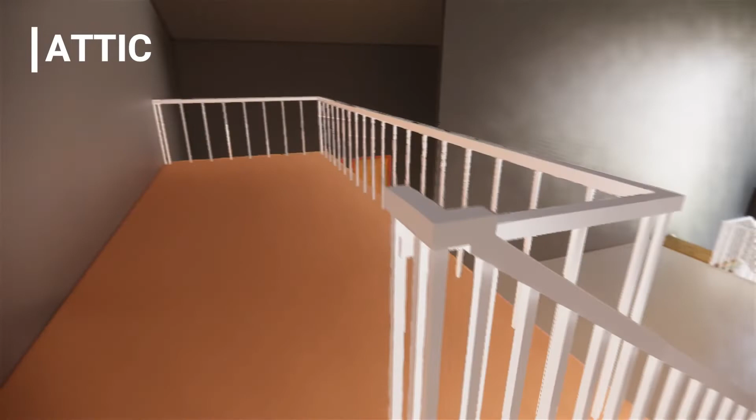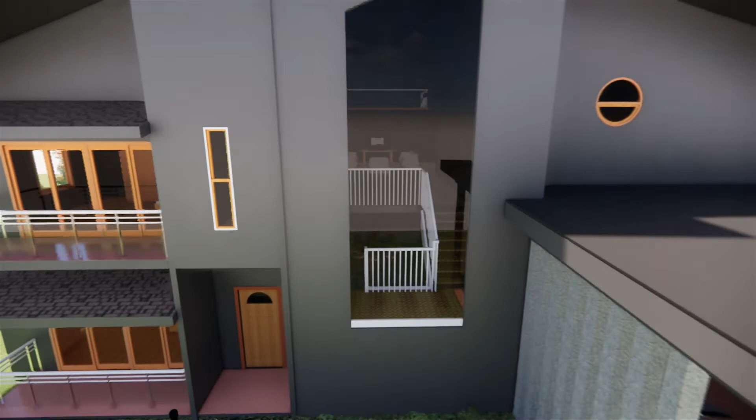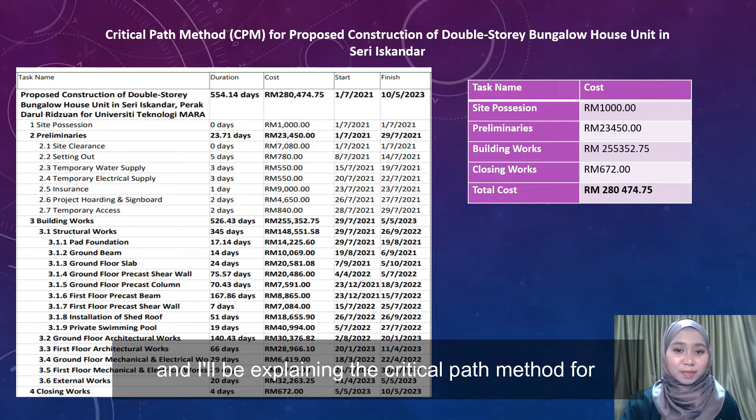Hi, my name is Nurul and I'll be explaining the critical path method for the proposed construction of a double-story bungalow house unit in Seri Iskandar, Perak.

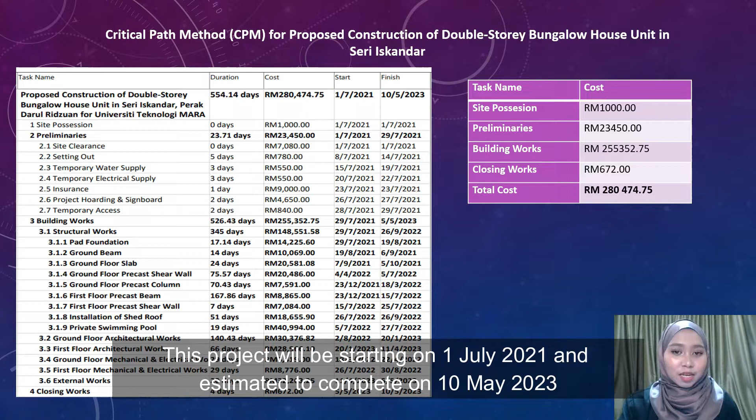Based on our estimation, the duration of this project is 554 days, around 22 months of completion. The cost of this project is RM280,474.75.

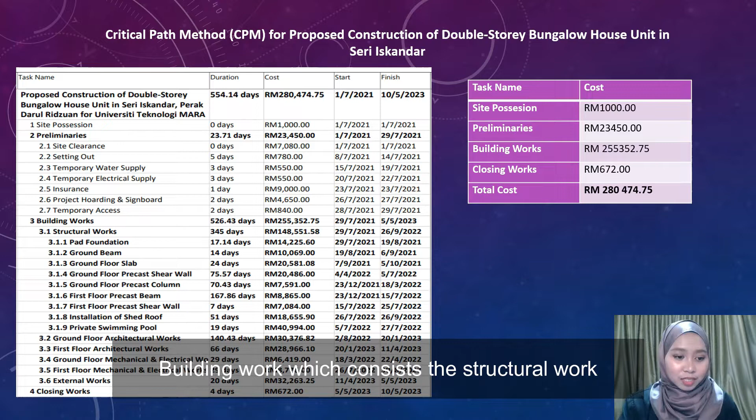This project will start on 1st July 2021 and is estimated to complete on 10 May 2023, starting with site possession on 1st July and continuing with the preliminaries work, building work which consists of structural works, ground floor and first floor architectural work, ground floor and first floor mechanical, electrical and plumbing work. The 3.6 is the external works, followed by the closing works.

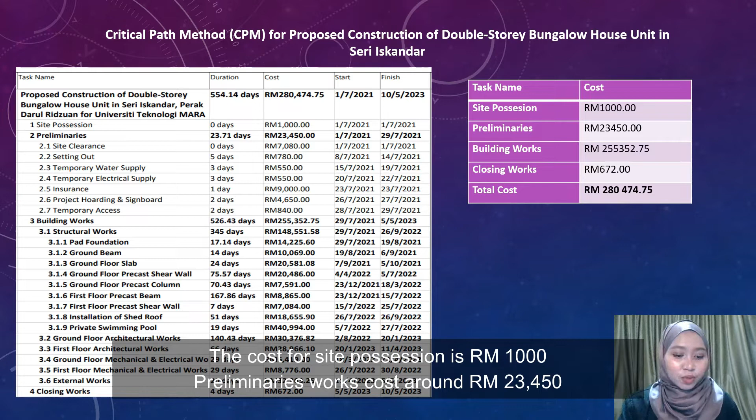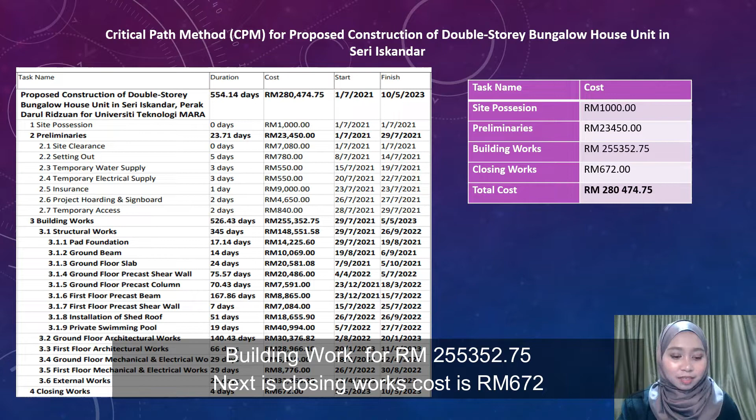The cost for site possession is RM1,000. The preliminaries work costs around RM23,450. Building work costs RM255,352.75. Next is closing works, costing RM672.

As you can see in the preliminaries work, there are site clearance, setting out, temporary water supply, temporary electrical supply, insurance, project hoarding and signboard, and temporary access.

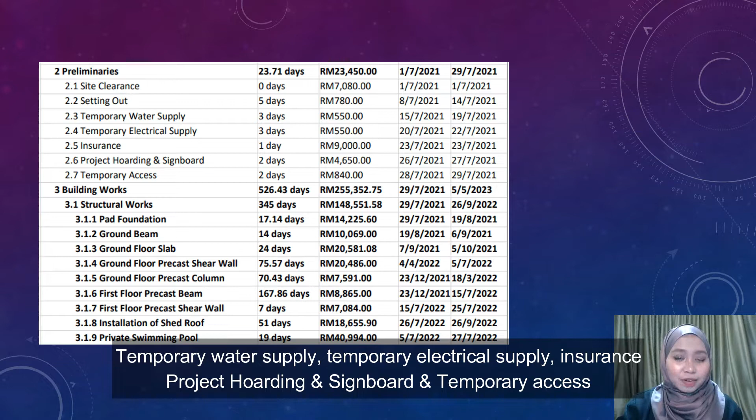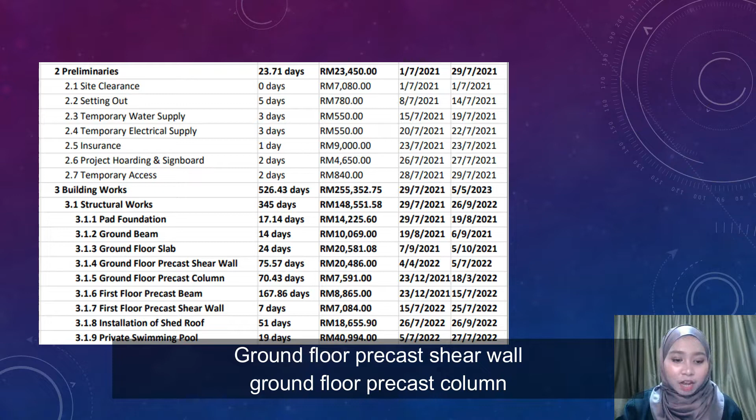Under building works, structural works, there are pad foundation, ground beam, ground floor slab, ground floor precast shear wall, ground floor precast column, first floor precast beam, first floor precast shear wall, installation of shed roof, and private swimming pool.

This is the financial and physical S-curve generated from Microsoft Excel. This graph includes cumulative cost and cumulative percent complete from the critical path method.

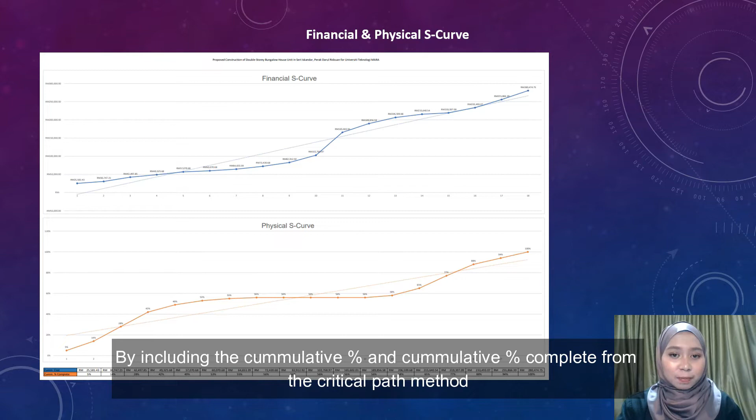Bismillahirrahmanirrahim. My name is Asyraf and I present to you the mechanical, electrical and plumbing of our proposed construction of a double-story bungalow house unit. For the electrical section, it can be divided into two, which are the power and lighting.

Firstly, let us look at the ground floor plan for the power. In this house unit, we are using duplex receptacle ground fault circuit interrupter, GFCI. The connection type is breaker and all of the sockets are paneled to a 600 amp 3-phase 208 volts. As you can view on the whole ground floor, we are applying chamfered wire as the type of wire arrangement, and the total sockets in the ground floor are 22 sockets.

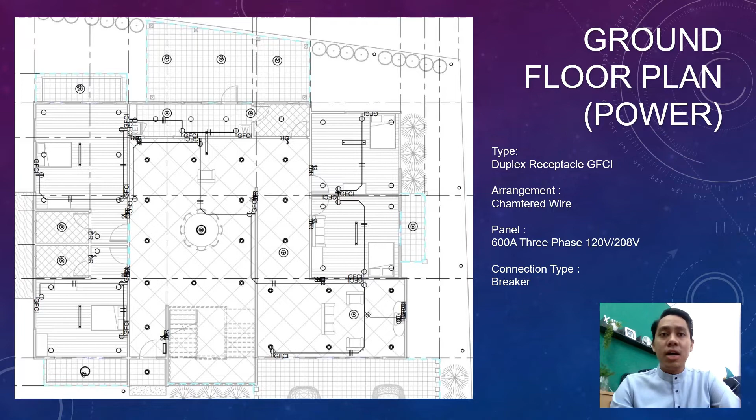Similar to the ground floor, duplex receptacle GFCI is used for the sockets, with a total of 18 sockets in the first floor. All of them are in chamfered wire arrangement, and every single space has a minimum of 2 sockets. Alright, moving on to the lighting floor plan.

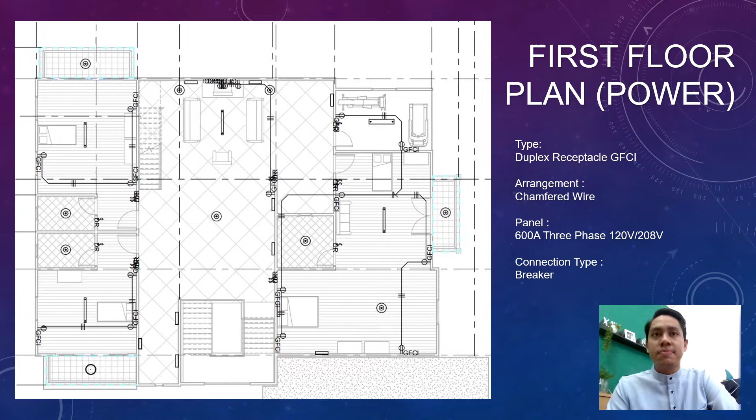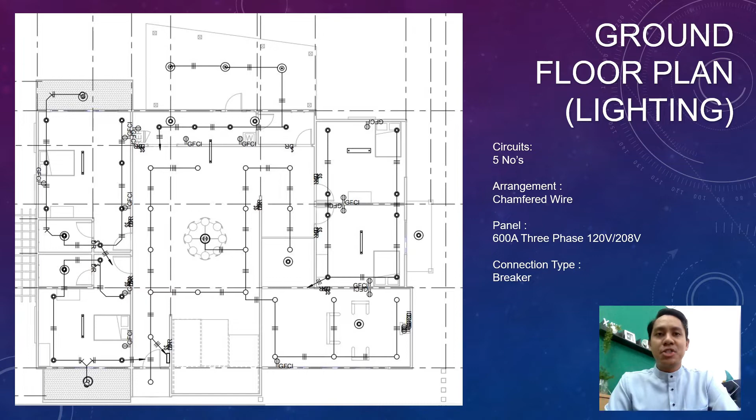As you can see, the wiring arrangement is also using chamfered type in the ground floor. A total of 5 circuits are connected as breaker to a 600 amp 3-phase panel board.

In contrast, a combination of arc wire arrangement and chamfered wire arrangement is implemented in bedroom 4 and 5 in the first floor. There are 5 circuits in this floor connected to different spaces.

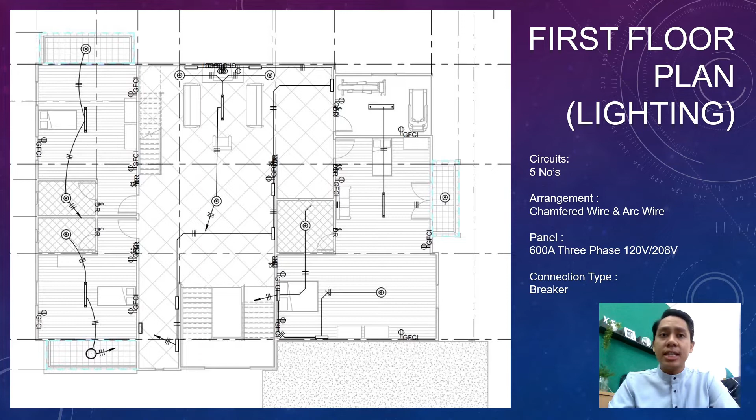In this building, different types of lighting features are used according to the spaces. There are 58 units of round ceiling lights in the bedroom, bathroom, kitchen and living hall. 2 units of pendant lights are used in the living hall and balcony.

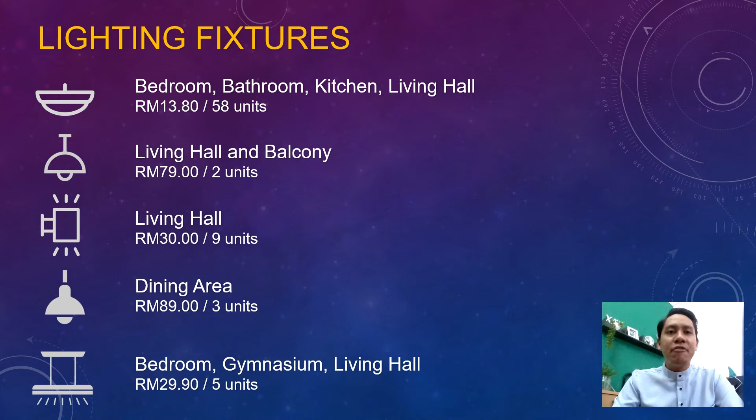Meanwhile, a total of 9 units of side-mounted recessed lights are in the first floor living hall. A hemisphere pendant light is used in the dining area, and 5 units of linear pendant light in the bedroom, gymnasium and living hall.

Furthermore, there are 2 types of piping system, which are sanitary and domestic cold water supply. As referred to in the drawings, the cold water is in blue color while the sanitary piping is in green color.

In all buildings, the cold water is supplied directly from the Lembaga Air Perak, and some of the features available in our buildings are bathtub, water closets, floor drain, kitchen unit, mop and work sink, and shower stall.

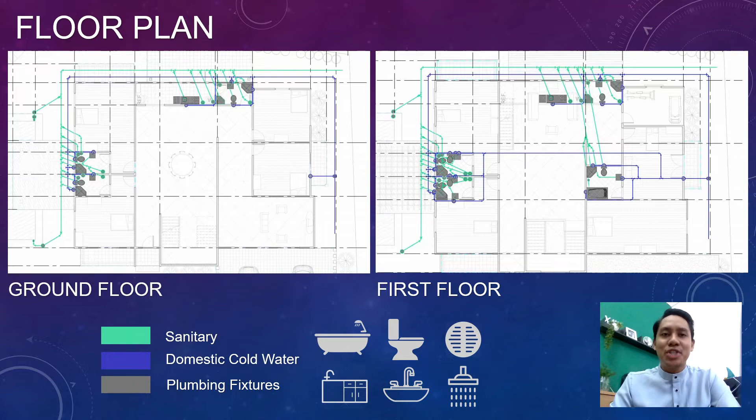Alright, to get a clearer view, here is the elevation of the piping system. The cold water supply is embedded 1 foot while the sanitary is 2 feet below the ground.

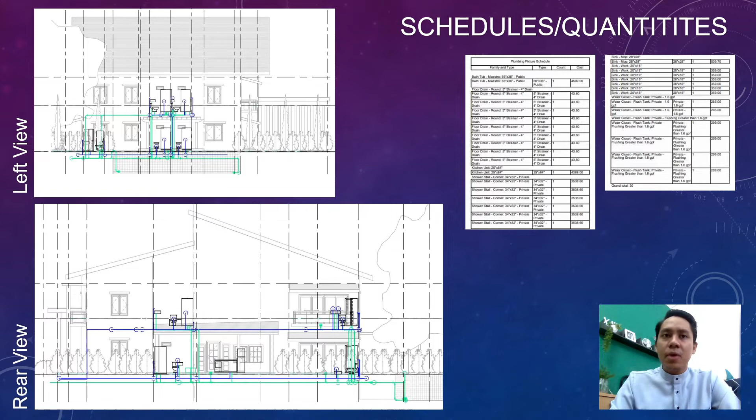The quantity and price of the plumbing system is tabulated in the drawings. And lastly, these are some examples of our plumbing perspective view in our buildings.

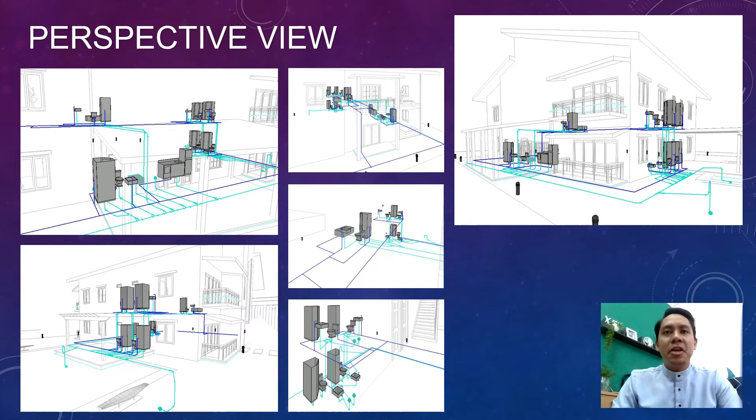This is our precast analytic structure. The precast elements are beam, column and shear wall. The structure is designed and constructed to withstand external loads without moving.

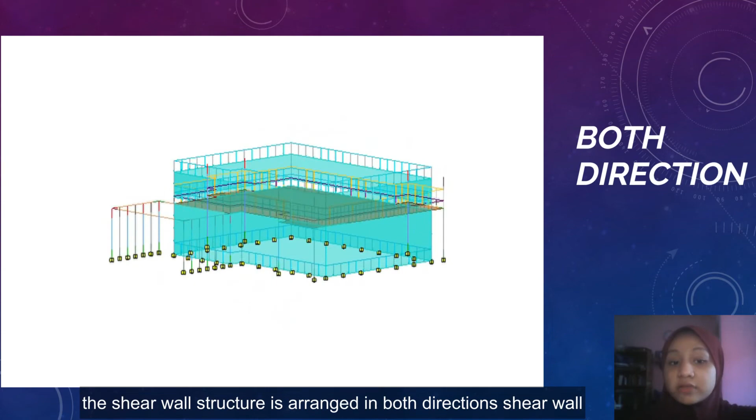Based on the concept of shear wall in the bungalow structure, the shear wall structure is arranged in both directions of the shear wall, which is the direction of two main axes of lateral stiffness. The bungalow is designed with shear walls to provide resistance to shear forces.

Next is the bending moments. The bending moment occurs when the structure is bent by a load at any point along its length. To calculate the bending moment for the bungalow, the magnitude of the loading is multiplied by the distance of the loading from the point of support.

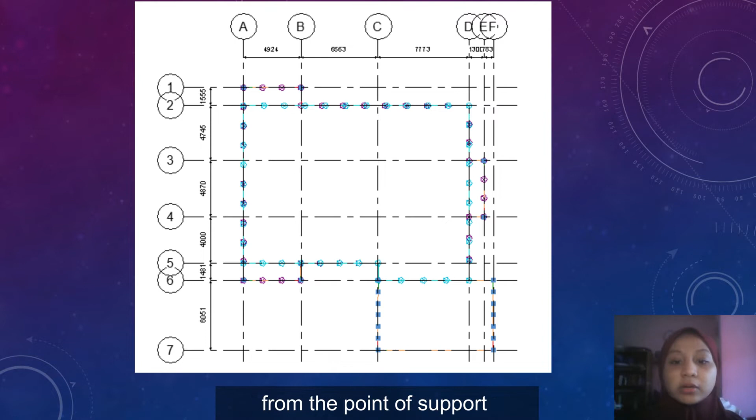The loading conditions for the bungalow are dead load, live load and wind load. This is the loading condition adopted for the analysis.

Firstly, the dead loads. The dead load is the self weight of the floor slab, considering 150 mm thickness: 0.15 times 24, where 24 is the unit weight of precast reinforced concrete, equal to 3.75 plus 1. So the dead load for the self weight of the floor slab is 4.6 kN per meter.

Next is the shear wall load. The shear wall load is 15 kN per meter.

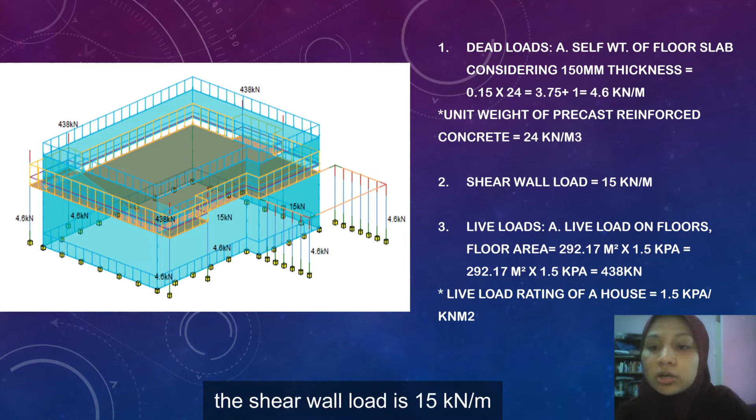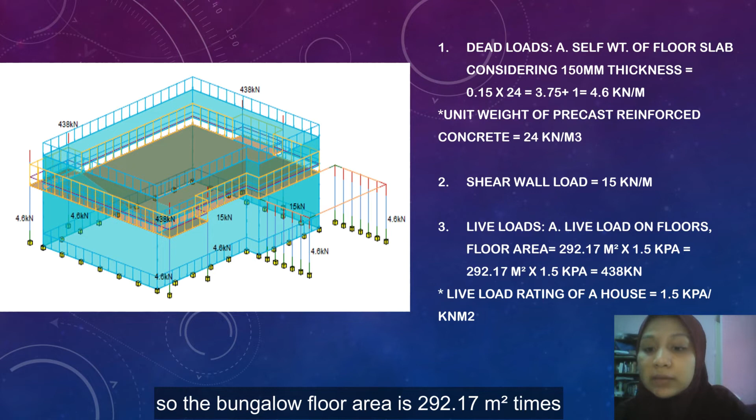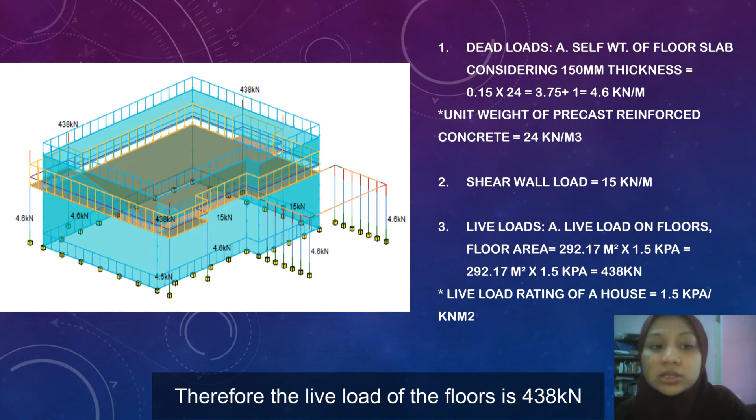The last one is live loads. Live load on floors: the bungalow floor area is 292.17 meter square, times 1.5 kilopascal, which is the live load rating of a house. So 292.17 meter square times 1.5 kilopascal equals 438 kilonewton. Therefore, the live load of the floors is 438 kilonewton.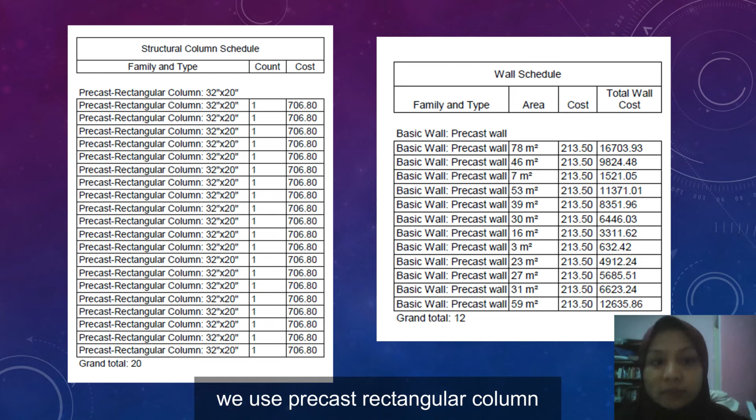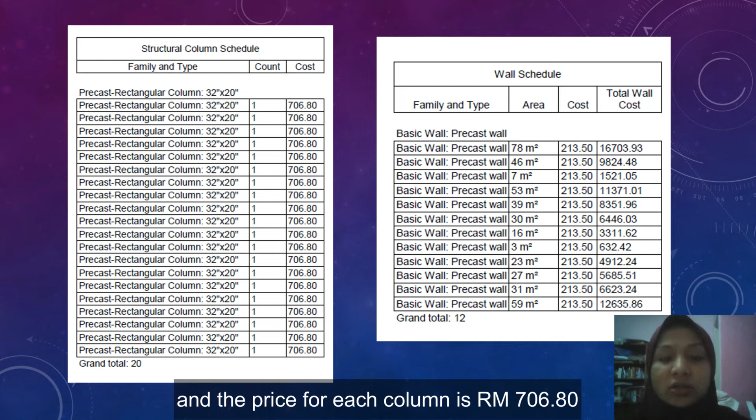Next, we move to the structural column schedule and wall schedule. For the structural column schedule, we use a precast rectangular column with the size of 32 inch by 20 inch, and there are 20 columns total used for the bungalow. The price for each column is 706 ringgit and 80 cents.

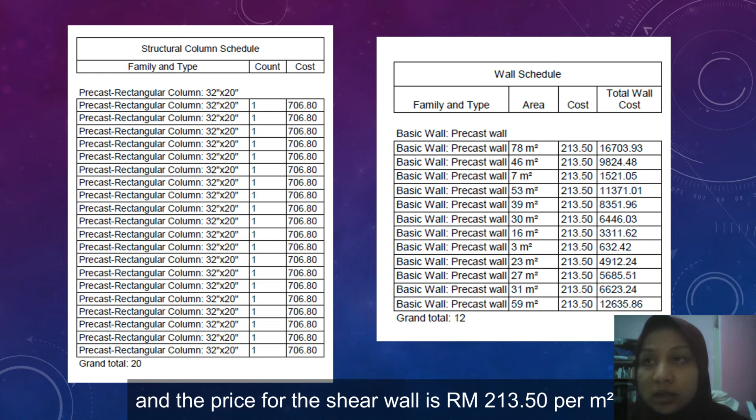Next is the wall schedule. For the wall, we use a precast shear wall, and the price for the shear wall is 213 ringgit and 50 cents per meter square.

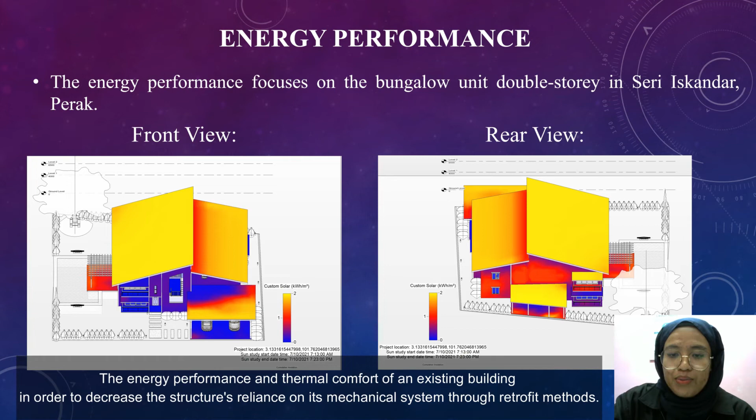This covers the energy performance and thermal comfort of an existing building, in order to decrease the structure's reliance on its mechanical system through retrofit methods. The energy performance focuses on the bungalow unit, double story, in Seri Iskandar, Perak.

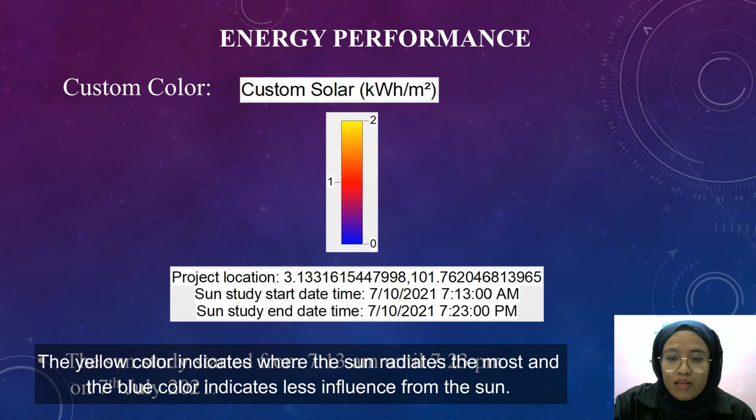The color on the sun study is from warm to cool. The yellow color indicates where the sun radiates the most, and the blue color indicates less influence from the sun. The sun study started from 7:13 am until 7:23 pm on 7th July 2021.

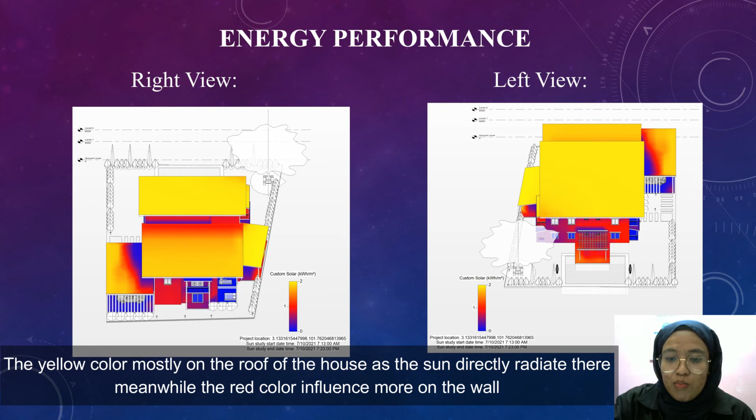The yellow color is mostly on the roof of the house as the sun directly radiates there, meanwhile the red color influences more on the wall. The blue colors are the cool areas inside the house, or areas blocked by the roof.

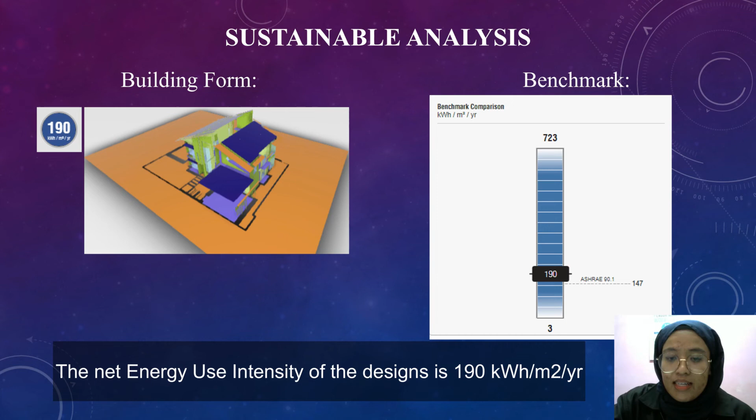For the sustainable analysis, the net energy use intensity of the design is 190 kWh per meter square per year. The ASHRAE 90.1 benchmark provided for this building design is 147 kWh.

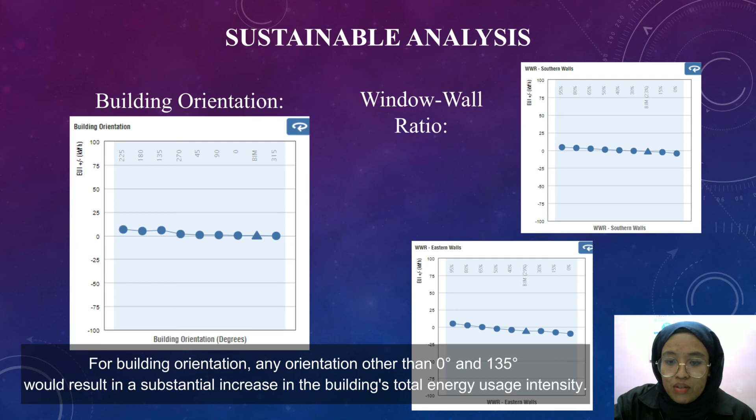For achieving energy savings, up to 15% window wall ratio is used on the south and east facing walls. Window shades at a height between 1/6 and 2/3 of the window height on the west and east can reduce EUI by 1% to 10%.